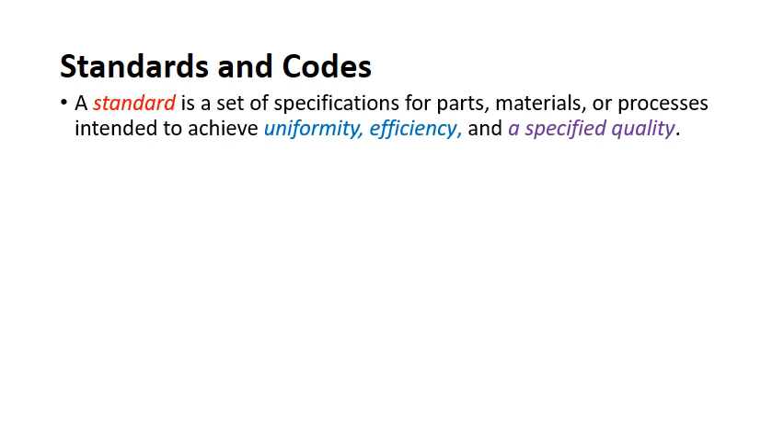For example, let's assume that a functionality has to be achieved through some machine element, fastening, let us say fastener. If you are asked to design a fastener, each one of you might come out with your own design. So when we come out with a product with several different designs of machine elements, it is really difficult to maintain it because the inventory size increases, inventory of tooling, size, shapes, and varieties will increase, right? So we don't have any uniformity. So if there is a repair, it is very difficult to find the component designed by you, right?

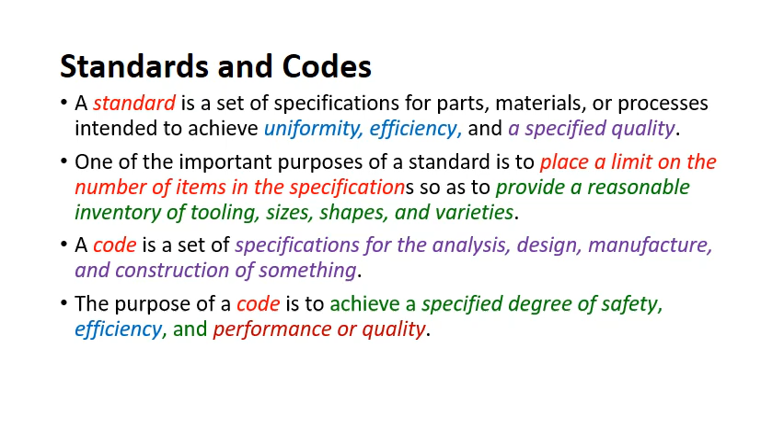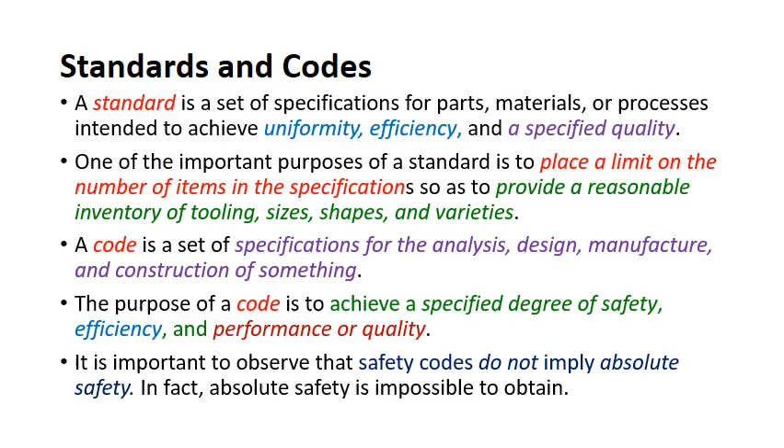On the other hand, code specifies how an analysis or design or manufacture of certain thing should be done. The idea is to ensure certain level of safety, efficiency, and then quality. So safety codes basically do not imply any absolute safety, as it is difficult to provide absolute safety. So we as operators must be cautious enough to use a product or a system as specified in the user manual.

The standards and codes are developed by the professional bodies in each of the discipline. So there are several standards in every discipline. Some of the standards which are of interest to mechanical engineers are those developed by America, United States of America, Germany, Japan, India, Britain, and so on.

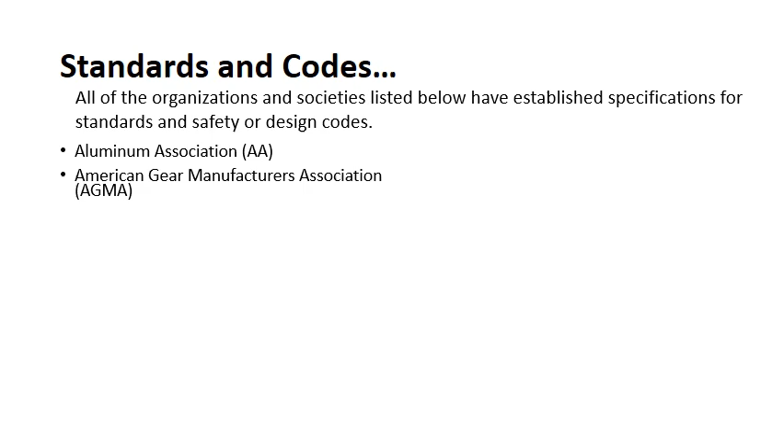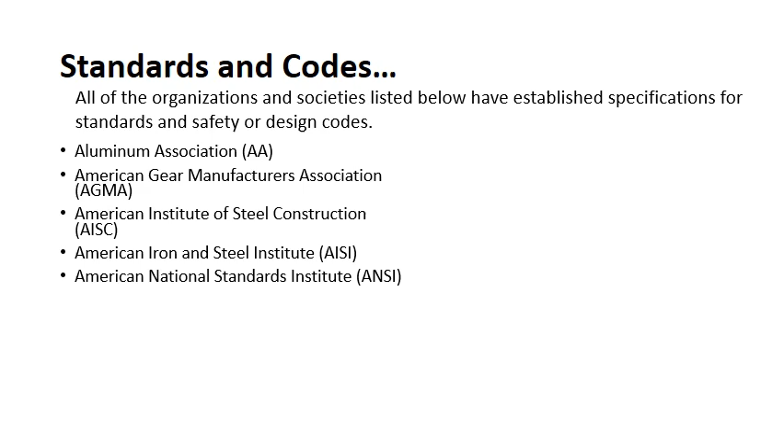So a few of them: Aluminum Association, American Gear Manufacturers Association, we will use this in the gear design, probably in your design of machine elements too. American Institute of Steel Construction, American Iron and Steel Institute, we use AISI designation of steels, we will see in the upcoming session. ANSI, ASM International, American Society of Mechanical Engineers, ASTM, meant for setting the standards for testing.

You would have studied ASTM standards in tensile testing and so on. Welding Society, standards for welding procedure, then Bearing Manufacturers Association, BSI, Fasteners, right? Institution of Mechanical Engineers, and so on. So these are some of the Society of Automotive Engineers, to name a few, right?

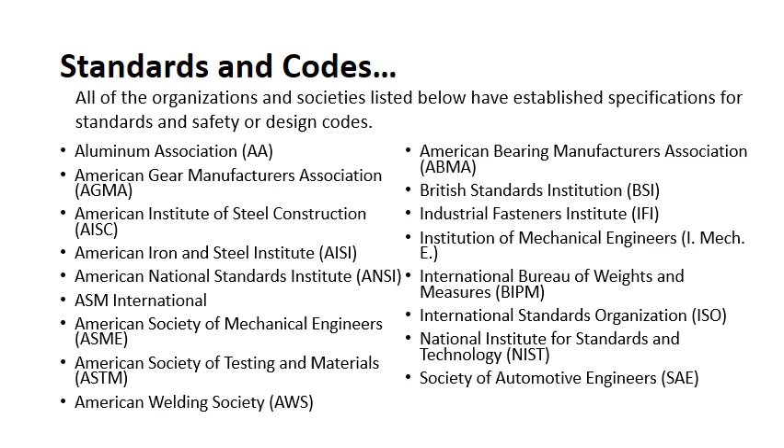So as and when you take up the design of a particular machine element, please look into the associated standard of the particular locality. See, standardizations are obligatory norms to which the characteristics of materials, products, or processes should conform. So these characteristics include the materials, dimensions, shape of the component, type of testing, method of marking, packing, and so on. So some of the standards which are used in mechanical engineering design are as follows.

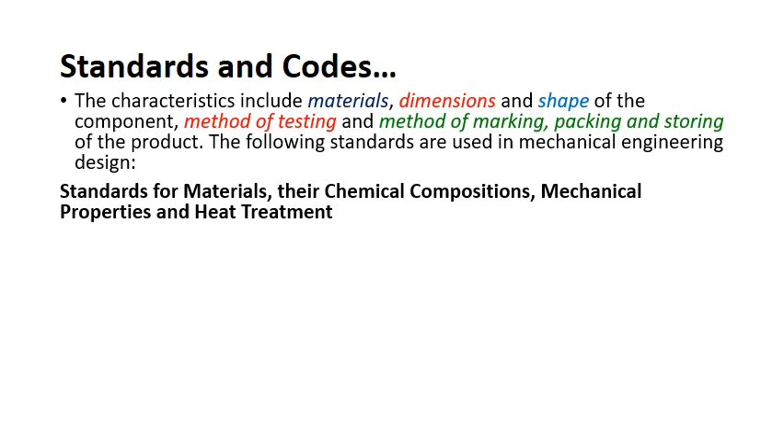So standards for materials, chemical compositions, mechanical properties, and heat treatment. We will look into only Indian standards. See, the Indian standard for material specification is IS 210. So as an example, we shall see how a grey cast iron is specified, FG 150, FG 200, and so on. FG means grey cast iron. What does these numbers indicate? These numbers are basically ultimate tensile strength in MPa.

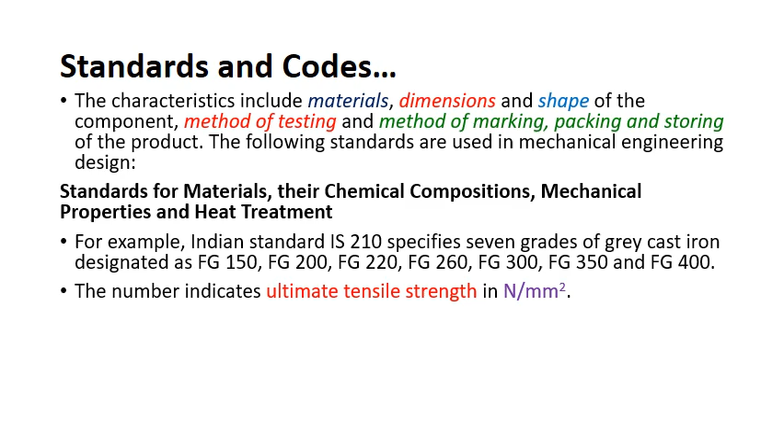Similarly, we have a standard for chemical composition, IS 1570 part 4. So how to specify the chemical composition? Here we have an alloy steel designated as 55Cr3. It is read like this: the carbon content varies from 0.5 to 0.6%, silicon percent from 0.1 to 0.35%, manganese from 0.6 to 0.8, and chromium 0.6 to 0.8%. We will see in the upcoming sessions as how to read this. There is a way to read it. I will explain it.

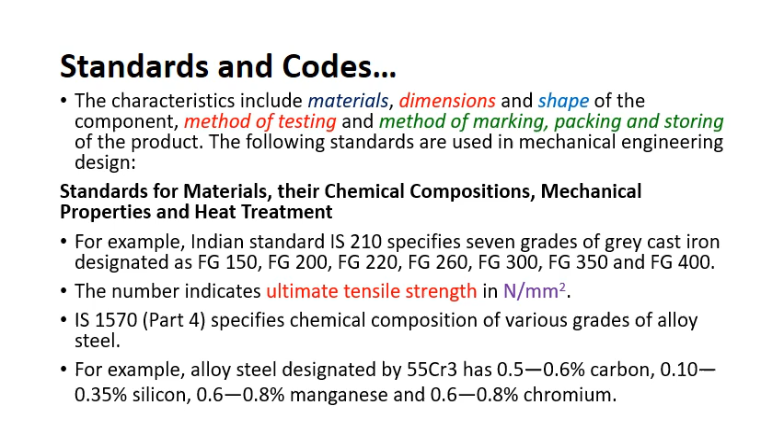The next standard is standards for shapes, dimensions of commonly used machine elements. So some of the commonly used machine elements are bolts, screws, nuts, rivets like fasteners, power transmission elements like belt drives, chain drives, and bearings, ropes, keys, and splines. These are couplings.

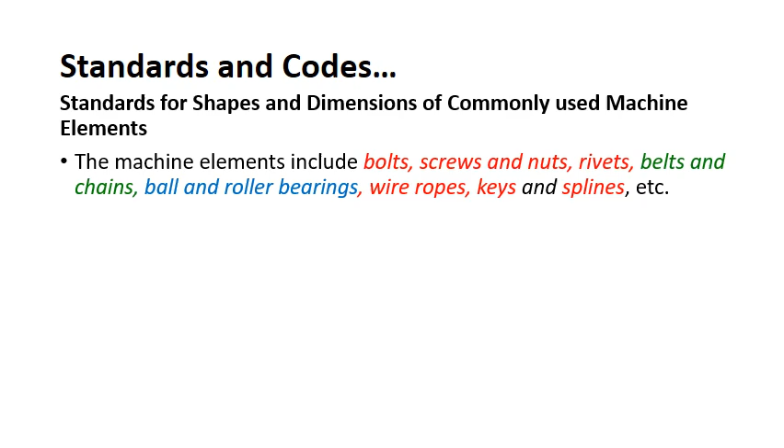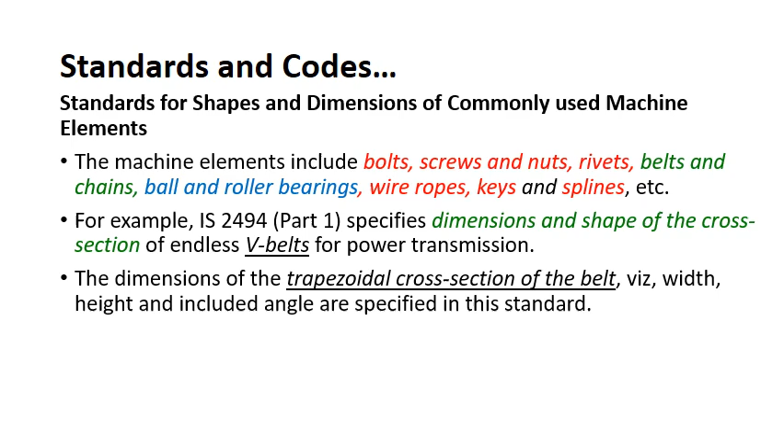IS 2494, Indian Standard 2494, specifies the dimensions and shapes of cross sections of power transmission elements like V-belts. Similarly, the dimensions of trapezoidal cross-section belt is also specified, like its width, height, included angle, everything will be specified. Dimensions of rotary shaft oil seal units are given in different parts of Indian standards, like its inner and outer diameters, width of the oil seal, and so on.

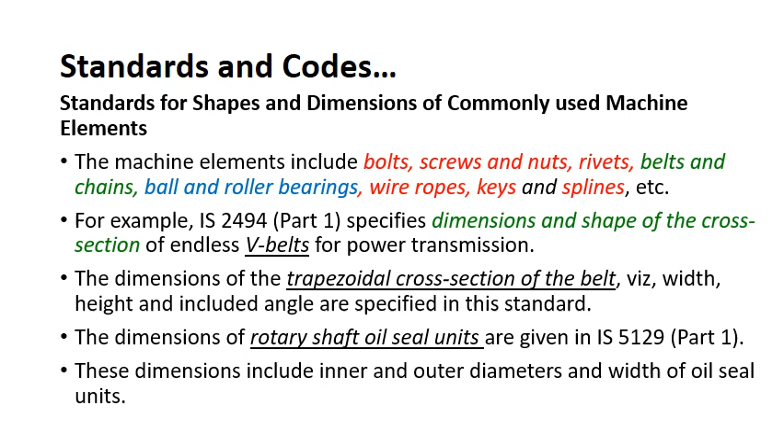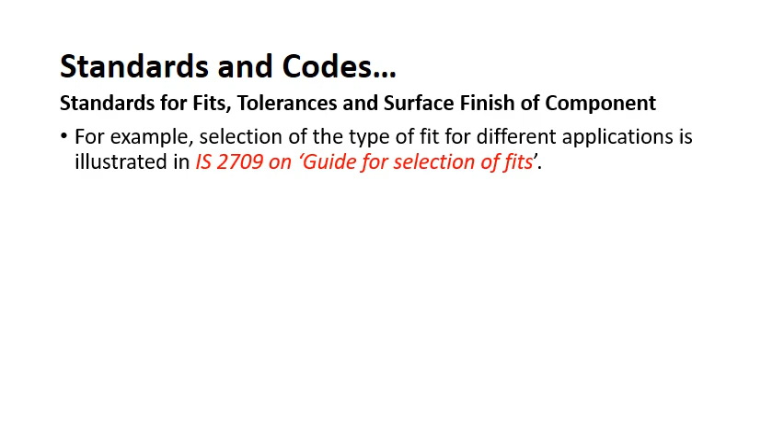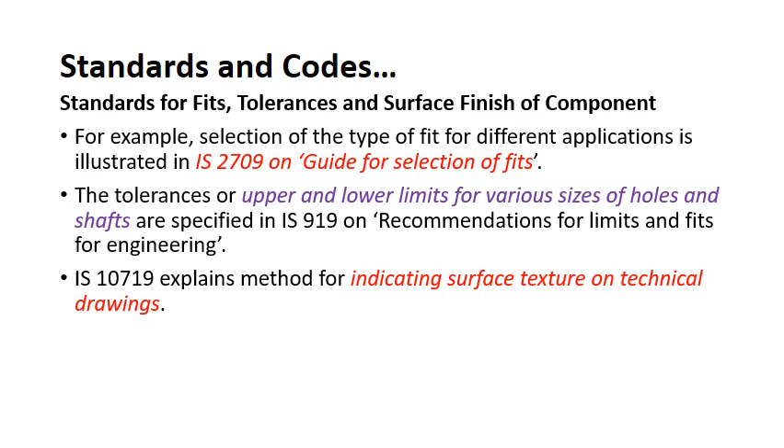Coming to the next, standards for fits, tolerances, and surface finish of the component. For example, IS 2709 will give us idea about what kind of fits have to be selected for a given application to ensure uniformity, safety, and a certain level of quality. The tolerances, like the upper and lower limits for various sizes of holes and shafts, are specified in IS 919 under the heading Recommendations for Limits and Fits for Engineering. Similarly, IS 10719 will tell us how to indicate a surface texture on technical drawings. You can also refer to IS 8000 for geometrical tolerancing on technical drawings.

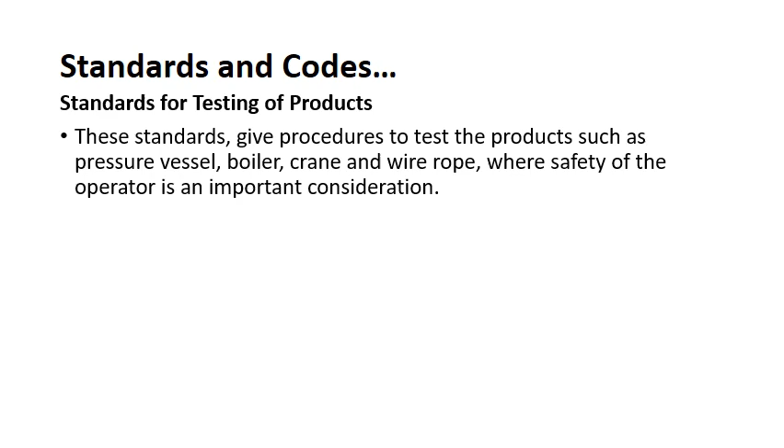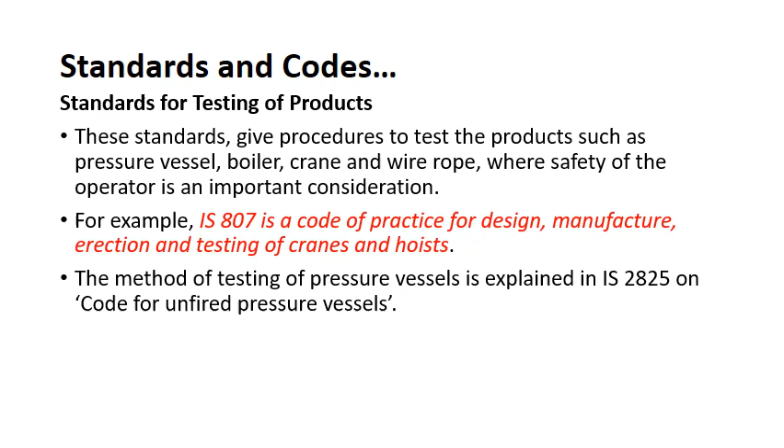The next standard is standard for testing of products. These give the procedures, the way the test has to be carried out for a given product like a pressure vessel, boiler, or any product, to ensure safety and reliability. For example, IS 807 will give us how to design, manufacture, and erect, and test a crane and hoist. Similarly, IS 2825 will give the method of testing of pressure vessels.

The last one is standards for engineering drawing of components. The Bureau of Indian Standards on Engineering Drawing Practice for schools and colleges can be referred, which will specify how to indicate various components of engineering drawing.

So what are the advantages of standardization of various products or machine elements? The first one is it will reduce the different types and dimensions of identical components, as said earlier, to a small number. As a consequence, it is easy for us to manufacture such standard components on a mass scale in a centralized process.

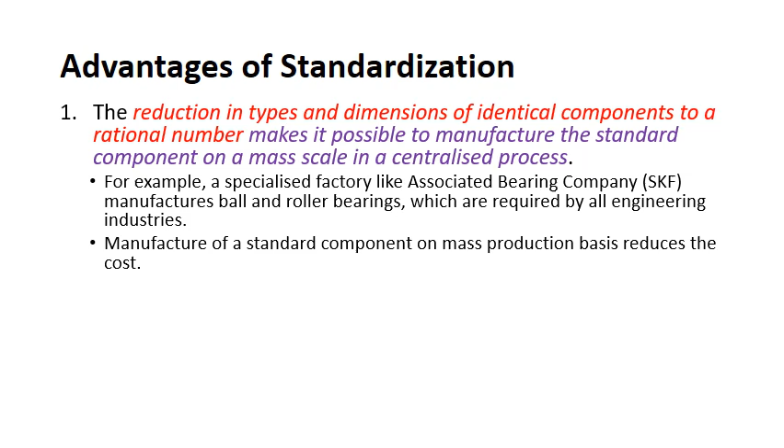For example, SKF is a bearing company which will manufacture ball and roller bearings required by most of the engineering industries. When we do such mass production, it will not only reduce the cost, it will also reduce the inventory. The next advantage is that when we have a standard part, it is easy to replace parts which are worn or failed.

And you can easily interchange it. So as a result, servicing and maintenance will be very, very easy. That is why when we manufacture a product, we ensure that it will adhere to certain standards.

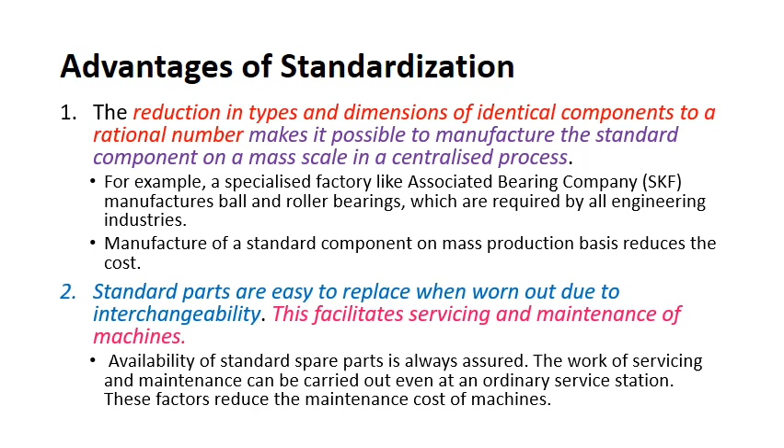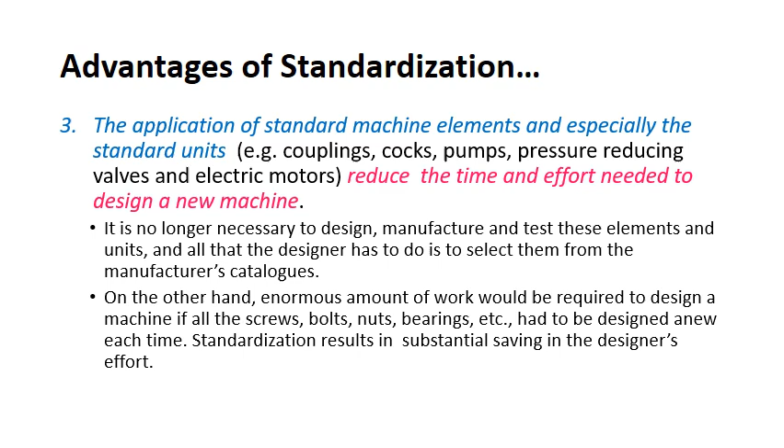The third advantage is that when we apply standard machine elements, it will reduce the time and effort needed to design a new machine. Because you don't need to design or manufacture these machine elements every time. You can just pull it out from the manufacturer's catalog and incorporate it in your new product or system. Suppose you don't have such standard parts, the situation would demand you to design all of the machine elements right from the scratch, which is really impossible. That is why standardization results in substantial saving of designers' effort, as well as time and money.

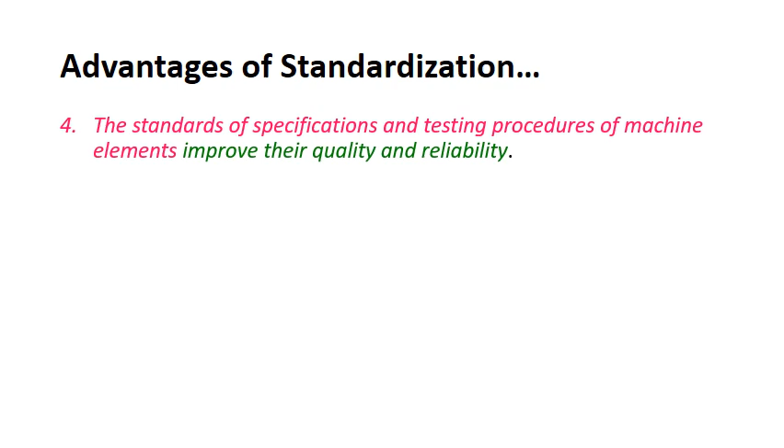And when we use standards, it will basically improve quality and reliability. For example, when we go and buy a product in the market, let's say you try to buy a dress or any home appliances, any electronic goods, you will try to buy a branded one which would have followed or implemented standards in their manufacturing, and hence the reliability would be increasing.

When we want to manufacture a certain product or a machine element, if you go to any shop floor, you would have seen the engineer looking at the drawing and then manufacturing it. It is in this drawing that all the dimensions of the components are specified.

Do you think it is possible to manufacture components to the specified dimensions in the drawing? For example, if you're asked to manufacture a 35 diameter shaft of length 10 meters, is it possible to manufacture exactly that? It is not possible because of reasons like inaccuracy of manufacturing methods, operator error, and so many other reasons.

So in such situations, what we do is permit a certain level of deviation in the dimension of the machine element without affecting the total functionality of the product. That permitted deviation from the exact dimension is what we call tolerance.

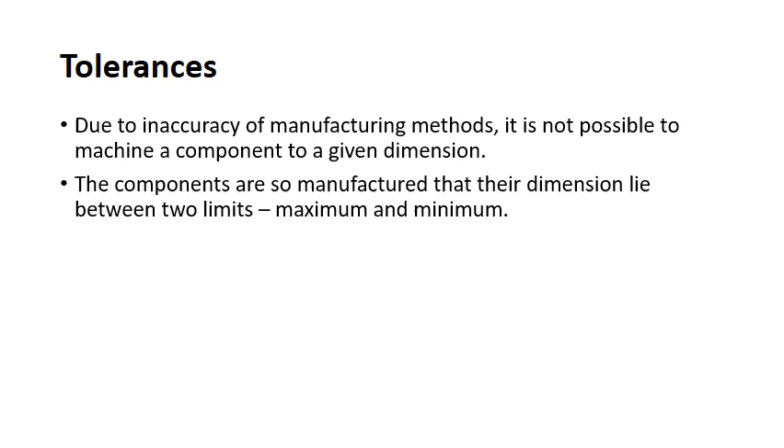The deviation can lie between two limits: an upper or maximum limit, and a minimum limit, from a given reference. That reference is your nominal size or basic size, which is the theoretical or exact size of the element.

We said a 35 diameter shaft - this 35 is called the basic size or nominal size. Since we cannot achieve this 35 diameter exactly, we permit some deviation, either above and below, or only on one side or the other.

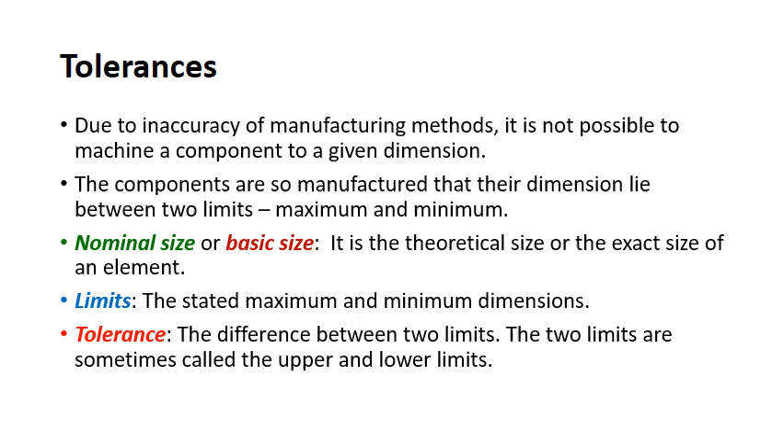So it can have 35.02 or 34.98. If the diameter lies anywhere between these limits, I can achieve the functionality of my product. This permitted variation defines the maximum and minimum limits. Technically, tolerance is the difference between these two limits, upper and lower.

Here we have the pictorial representation of the concept of tolerance and the various terms associated with it. Let us take a simple shaft and hole assembly. Here you have the side view and here the front view. In the side view you can see the shaft and hole size.

Shown to their nominal size as well as permitted deviation, this hatched region is actually the tolerance. The bottom one is the shaft tolerance, and the upper one is the hole tolerance. On the front side you can see a zero line, which is our nominal size.

You can see the upper deviation and lower deviation of the hole, and similarly for the shaft - the basic size of the shaft, and the tolerance zones for both the hole and the shaft. You must remember this to understand the concept of fits in the next lecture.

Take your time and try to understand, it is very easy. The hatched region indicates the tolerance zone. Tolerance zone means my shaft dimension can lie anywhere within this zone, and if it does, I can easily achieve my functionality.

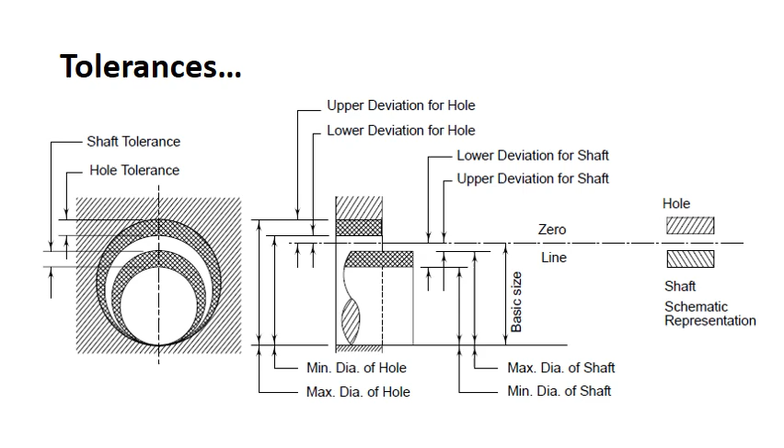There are two types of tolerance specifications. One is the unilateral system, where the variation of the nominal size is permitted only in one direction, either on the plus side or the minus side. For example, here is the basic size.

This is the way we indicate the tolerance: 100 is the basic size or nominal size, and the lower limit is 0.00 while the upper limit is 0.04 - variation only on the plus side. So the lower limit is 100 plus 0.00, that is 100, and the upper limit is 100 plus 0.04, that is 100.04.

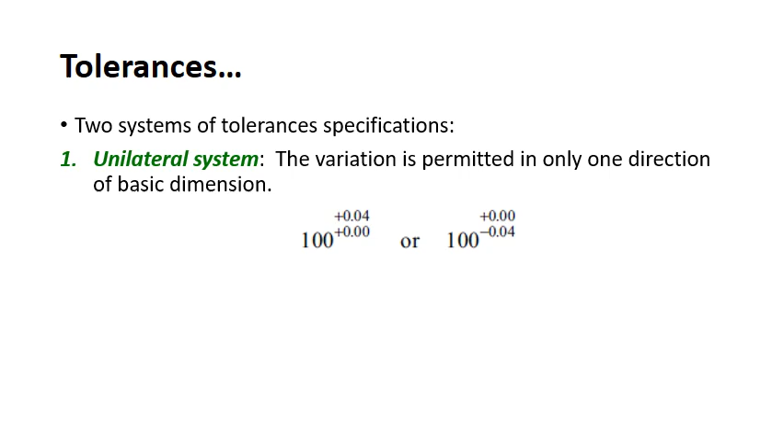This is also a unilateral specification of tolerance, but with deviation on the negative side: 100 minus 0.04, with 100 still as the upper limit.

The next type is the bilateral system, where variation is permitted in both directions of the dimension. For example, 25 plus or minus 0.4, giving equal variation on either side. The upper limit is 25.4 and the lower limit is 25 minus 0.4.